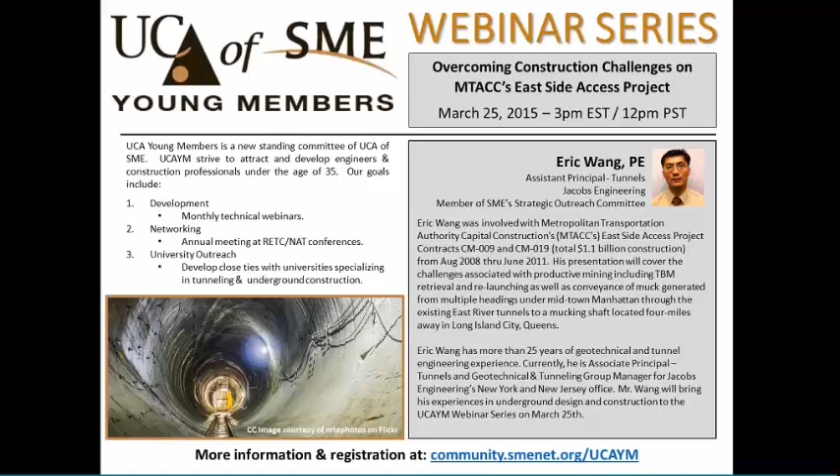Welcome and good afternoon, everyone. Thank you for joining today's webinar entitled Overcoming Construction Challenges on MTA Capital Construction's East Side Access Project. My name is Eric Wang, and I'm coming from Jacobs Engineering.

This slide is a brief background. I'm originally from Montreal, and I earned a bachelor's in civil engineering, as well as a Master of Engineering in mining engineering from McGill University.

I began my career working for a tunneling contractor in 1989, working on a $3 million drill and blast tunnel job, a connecting tunnel under the St. Lawrence River that also featured shaft sinking and tie-in to an existing plug to the Southern Interceptor. That was my first tunnel construction project, and I was with that contractor for about 3 years.

In the early 1990s, things started to slow down in the underground industry, in Montreal in particular, and I relocated to New York to join the Geotech and Tunneling Division at Parsons Brinckerhoff, working on several tunnel assignments such as New York City DEP's New Croton Aqueduct.

That was a pressurization study. There was the Cumberland Gap Project, New York City Transit 63rd Street tunnel connection, Cleveland Hilltop Interceptor, as well as another light rail project, the Portland West Side Light Rail Project.

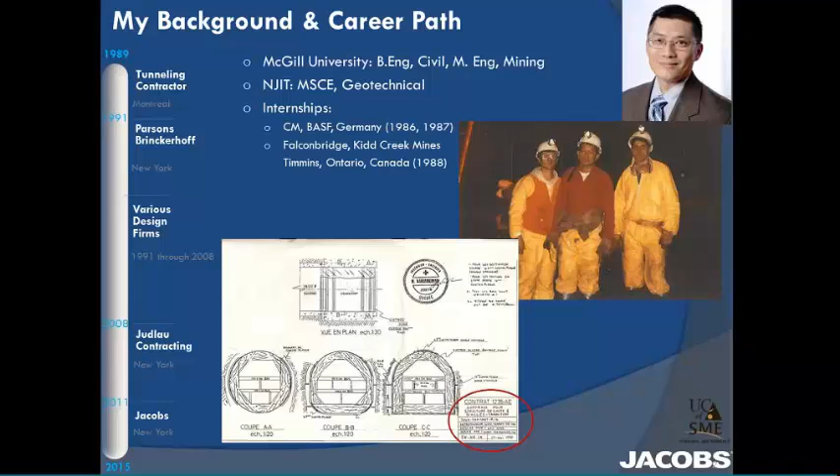Just a little brief rundown on how I got started in the tunneling business. My father was a bridge structural engineer for CP Rail and encouraged me to pursue an undergraduate degree in civil engineering. From there, I took general civil engineering courses, and I began a master's in 1988 in mining underground.

During my first interview, one of the interesting questions that came up was what my real career goals and interests were. This is the tunneling contractor that I began working with. I mentioned my background with civil, general civil background, as well as my interest in underground construction. There was a connection, since he had previously been working for Atlas Construction.

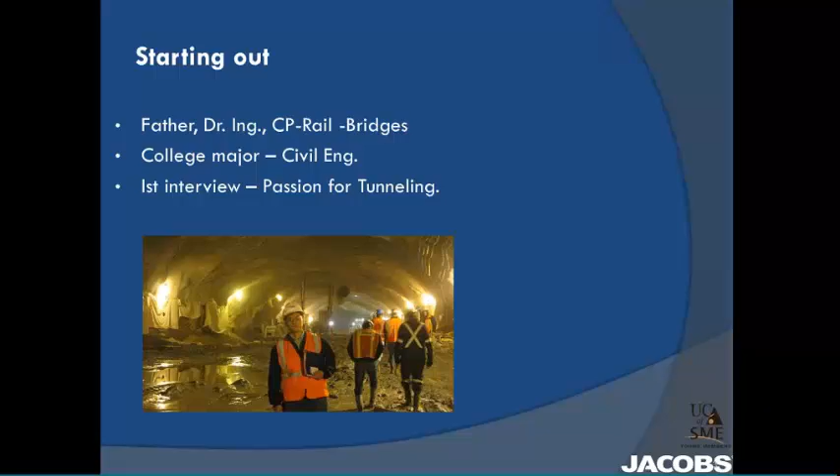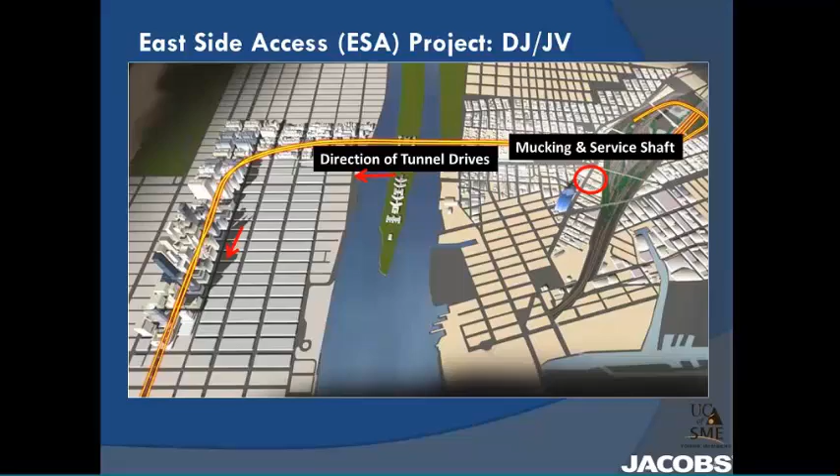The shallow cover under existing subway crossings, and we'll go into some of the challenges that included multiple TBM backup and relaunches, as well as mucking from the heading in Midtown Manhattan out of a mucking shaft located 3 to 4 miles away in Long Island City, Queens.

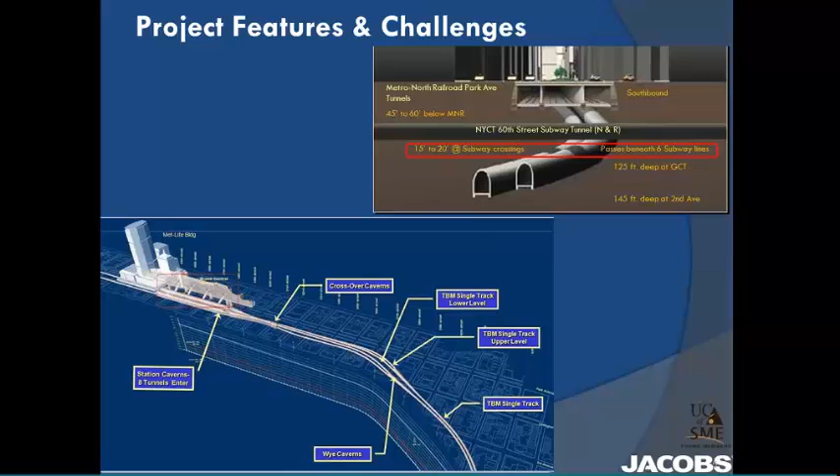Okay, some basic description of the project. We talked about the 8 22-foot diameter TBM tunnels for a total of just over 32,000 linear feet. Cover range from a minimum of 45 to 140 foot depth.

So some of the key dates on the project. It actually involved 2 contracts. The first contract was running tunnel, CM009 Manhattan Running Tunnel. The notice to proceed was June 2006. The first TBM, the Seli TBM, was launched September '07, the eastbound drive, followed a few months later by the Robbins TBM in the westbound tunnel. There was notice to proceed a year later, May 2008, for the cavern structures. Substantial completion was June 2013.

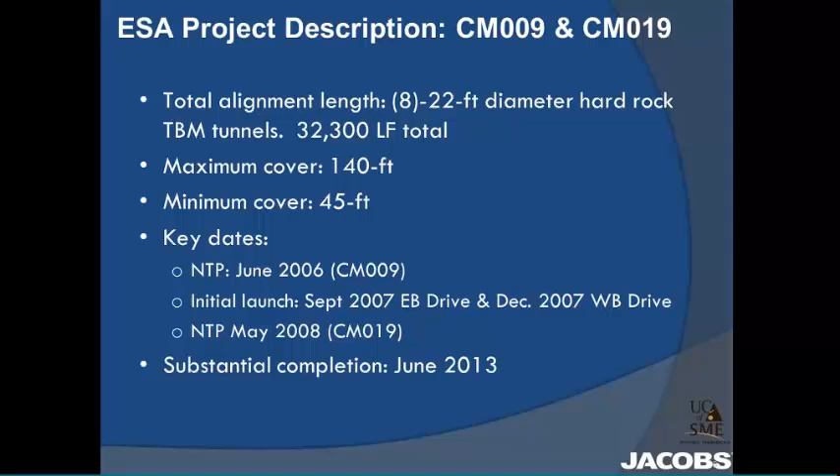Basically, my role was twofold. Geotech engineering manager for Judlau, which involved working as a design liaison between the GEC, the PMCM, and our various design subconsultants, and also providing technical oversight, in particular for the excavation initial support design.

Then in the latter half of my stint, I was involved in the swing shift as a project engineer, overseeing specific operations including cross passage, drill and blast excavation, roadheader enlargements of the TBM tunnel, pre-support in shear zones, and the topic we're going to discuss in more detail: the replacement of ribs for TBM backup, as well as launching and TBM relaunch using the concrete plug concept.

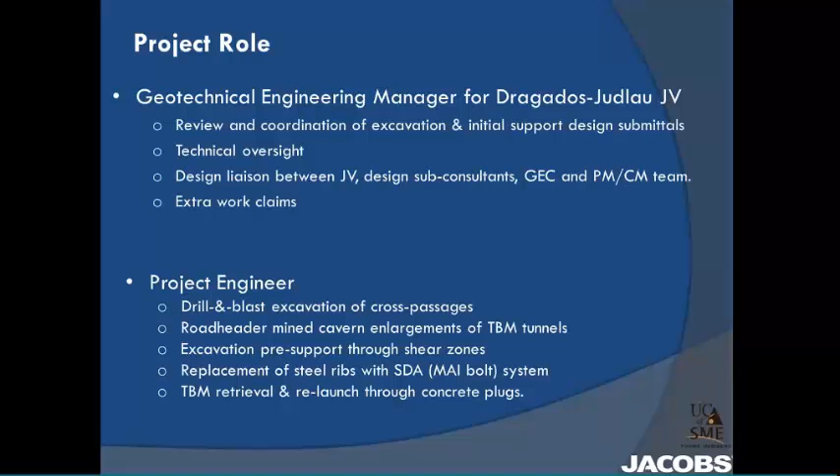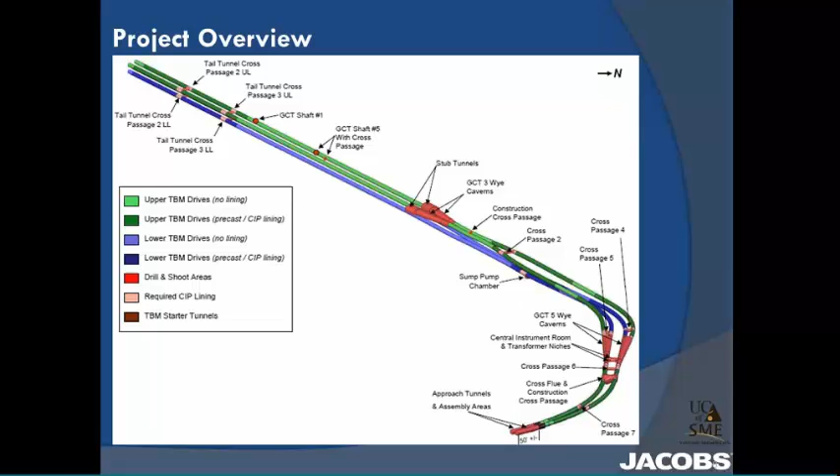Our webinar is going to concentrate on 3 key challenges: expediting the relaunch of the TBMs using the concrete plug concept and why we had to do that; some of the challenges with muck handling and muck conveyance, since the mucking shaft was 3 to 4 miles away from the heading, dealing with various types of muck, shot rock and drill and blast, as well as roadheader fines and TBM muck; and also, to permit backup of a fully assembled TBM, how we overcame the rib replacement sections that had existing steel ribs.

So let's begin with the relaunch of the TBM. Again, we had multiple TBM drives, backup and relaunching operations. What we're showing here in red is the Wye Cavern area, where we had to back up the TBMs, create a starter tunnel with a roadheader, and then relaunch through to the subsequent drive. Then we'll look at why that proved not to be feasible in terms of construction schedule.

Looking at some of the excavation options we had to choose from: conventional drill and blast were available, as well as roadheader and TBM.

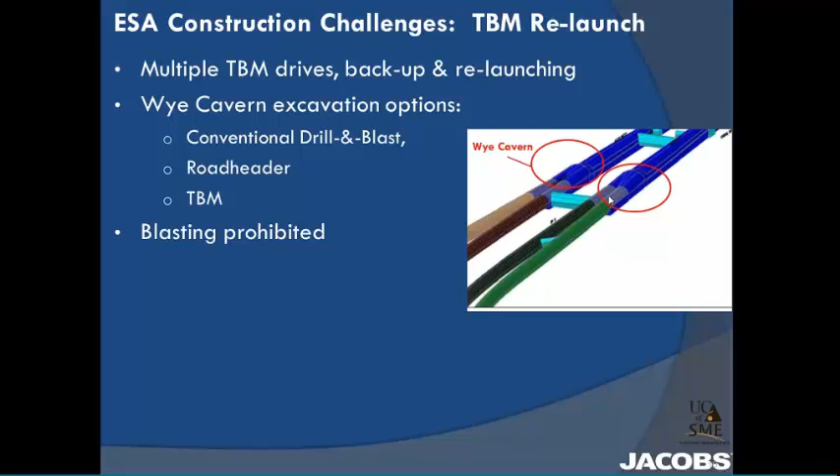So here we're looking at the mining sequence that was used in the initial Wye Cavern enlargement. This is over on GCT3 eastbound. We used the road header. You can see the road header in these three different sections, the small, medium, and large Wye Cavern section. You've got the road header mining,

enlarging the existing TBM tunnel. Over here you've got the drill jumbo installing the initial support, and then you've got the scoop tram working on mucking out the heading.

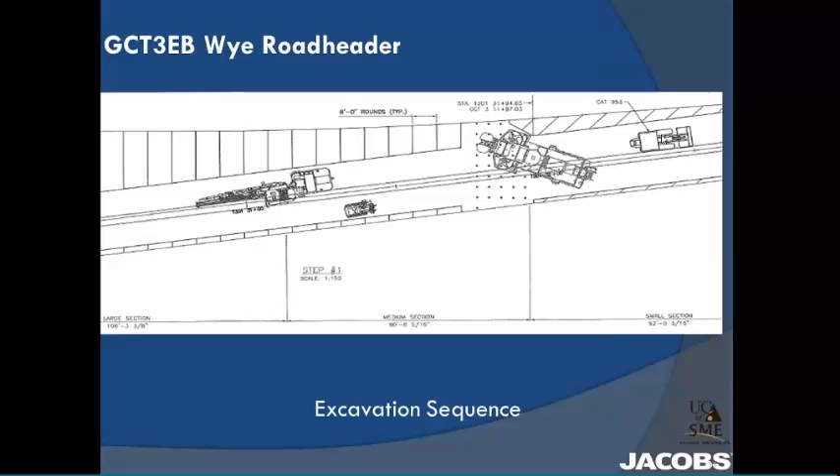Okay, here, this cross section, as we mentioned, we looked in plan view, we saw the small down here, medium, and then the large Wye Cavern sections. And what I'd like everyone to focus on is the ramp, the muck ramp that we had to create in the medium and large Wye Cavern section. The purpose of that was to provide access for the road header so we could reach the arch, excavate the arch, get access to that.

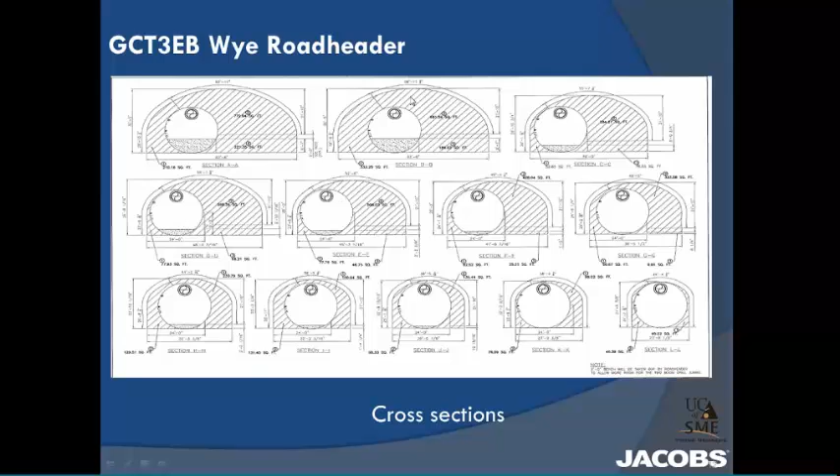Okay, talking about some of the specific construction challenges with the road header, some of the material that we encountered at GCT3 eastbound proved to be very abrasive amphibolite, in particular below the spring line, that generated extensive wear on the picks, so a lot of delays with changing out the picks on the road header cutter head.

The solution we ended up resorting to resolve that is chemical expansive additives. The damite was used. We drilled holes to insert the damite so that we could essentially soften up this hard abrasive amphibolite to facilitate road header excavation. Also very time consuming.

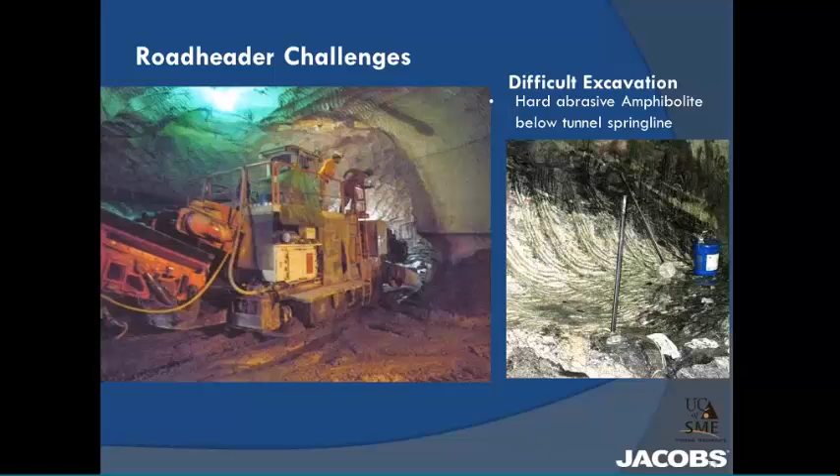Another consideration that we had with the road header option in developing the Wye Cavern is we had to create a starter tunnel in order to launch the TBM. What that entailed was the reinforcement of the existing narrow pillar. You see this narrow pillar here?

We used pre-stress through bolts, number 8 Dywidag, pre-tension to 15 tons on a 4x4 pattern. That was the stabilization method used for the pillar.

As well, you can see up in this area, we also included channels to help stabilize the areas where the grippers would be launching out of the starter tunnel.

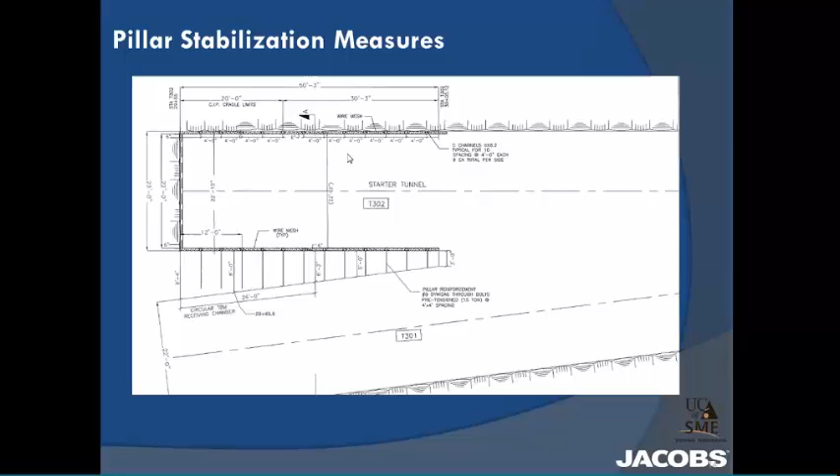So here we see a photo of the drill jumbo working from the completed TBM drive, the initial TBM drive, and installing the through bolts, pillar reinforcement into the starter tunnel.

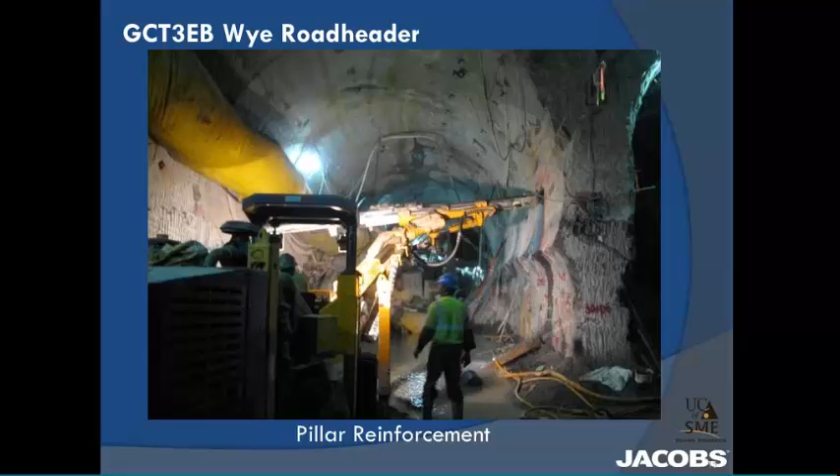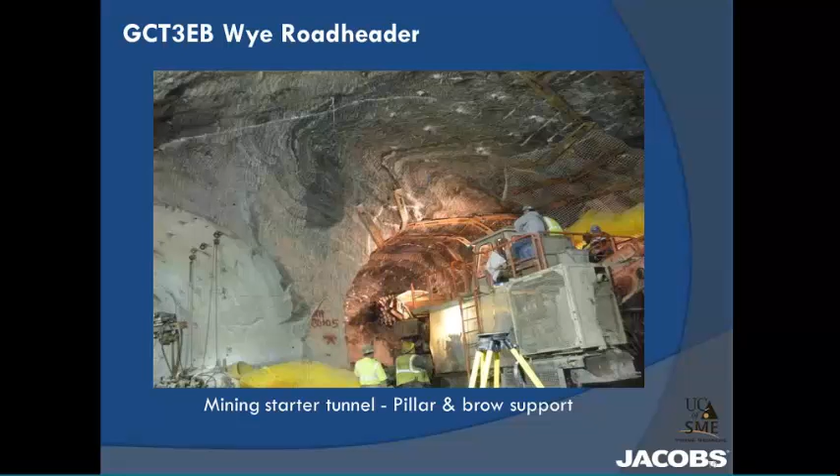Here, another lengthy operation with the initial roadheader option was to set rail, pour a flat invert, and to set the TBM cutter head on rail-mounted dollies, backing it out of the existing tunnel drive, and then here we see it advancing into the starter tunnel.

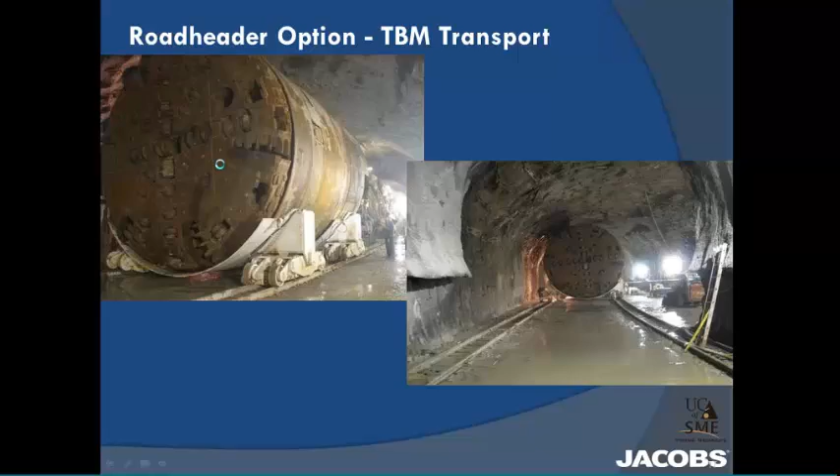So based on all these considerations and the need to accelerate the construction schedule, we had several VE sessions with the GEC as well as the program management and construction management team. Some of the constraints that we had to incorporate into any brainstorming solutions were the existing geometry that was fixed, what the ground conditions were, these favorable ground conditions, or any options that we would be looking at to accelerate the relaunch, obviously the schedule.

So based on these multiple discussions, these VE sessions, the outcome was the concept of the concrete plug, which we'll talk into a little more detail.

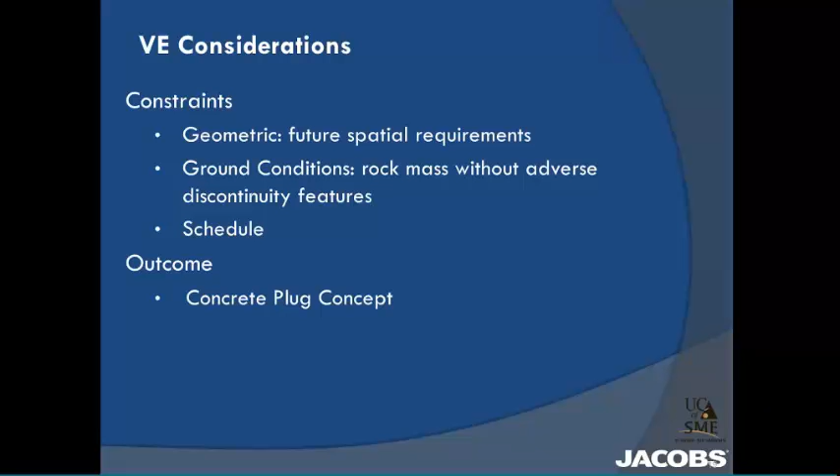We started with the initial concrete plug, a cellular concrete mix, with the basic objectives of optimizing concrete volume, minimizing how much concrete since this is a temporary plug that we have to mine out later, and maximizing the amount of rock excavation. You can get a lot more effective rock excavation using the TBM than the very slow roadheader, and drill and blast was not an option because of the restrictions below Grand Central.

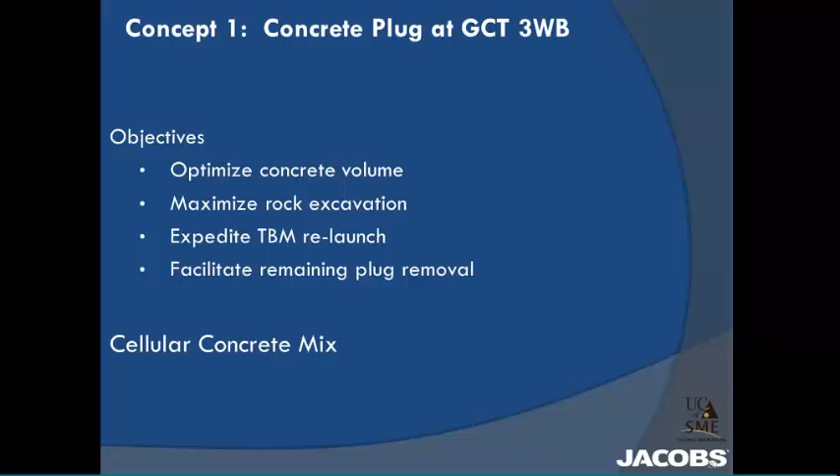The main objective is to relaunch that next TBM drive, and we looked at options that could help accelerate removal of the remaining plug within the Wye Cavern. So let's look in a little more detail.

Here's the layout. What we see is the existing tunnel, the outer tunnel, heading down into the station, going north to south. This is the location where the concrete plug was poured, and here, this second drive is the TBM that mined through there. You see the concrete plug was extended still within the Wye Cavern to a certain point where we achieved the minimum pillar thickness. That's why the temporary concrete plug was extended to this point to get that minimum pillar thickness. This, being temporary, would have to be mined out with the roadheader or various excavation options.

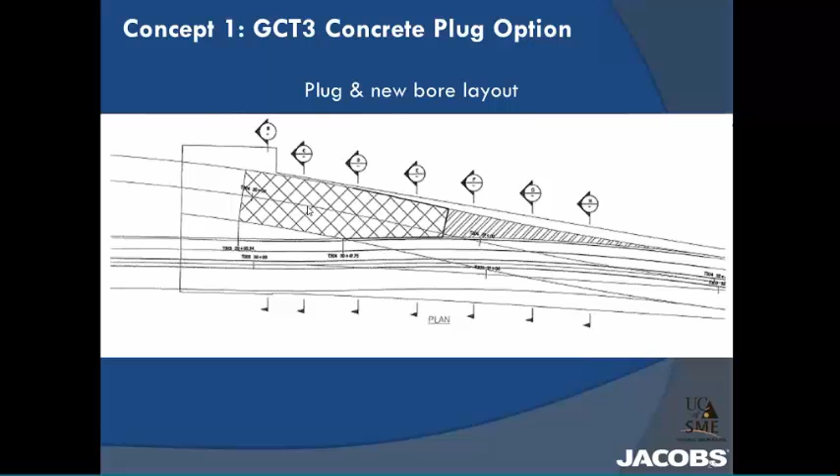I want to show a comparison of what we did on the eastbound side using the slow roadheader, 7.5 month duration, versus what we tried to achieve with this new option, the concrete plug, pouring it in the existing tunnel and accelerating the TBM relaunch.

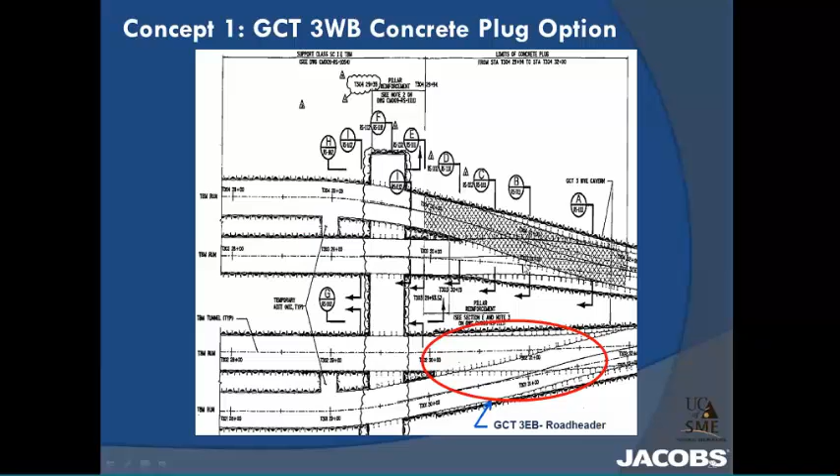Let's look in a bit more detail. Here's the cross section showing the various sections within the Wye Cavern, keeping in mind these are the limits of the Wye Cavern we have to achieve. What's important is these are not the typical bolts we use for the running tunnel - this is an area where you enlarge the TBM running tunnels to bifurcate into the Wye Caverns, so these are longer bolts that had to be installed.

These bolts had to be installed in the existing tunnel prior to the concrete pour, and then in the subsequent tunnel we installed them after the TBM was relaunched.

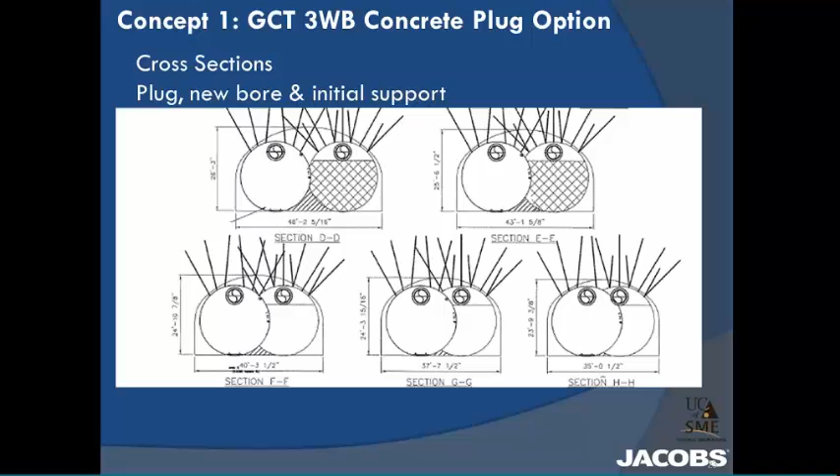Another important consideration was how the main bearing would hold up under this mixed face condition - rock as high as 14 KSI unconfined compressive strength versus cellular concrete at about 1 KSI. This uneven loading had to be considered, so we did an analysis of the maximum overturning moment the main bearing was designed for and compared that with this mixed face condition. With that, we were able to back calculate and figure out the limit on our thrust on each of the disc cutters so we would avoid damaging the main bearing.

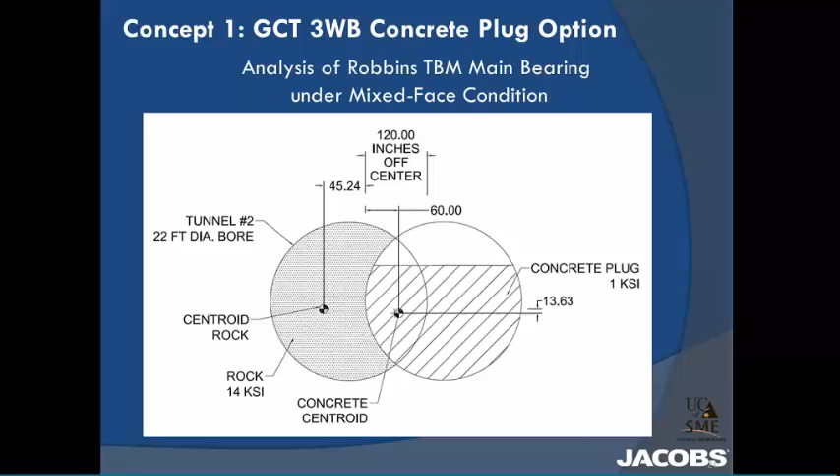Another interesting note is some construction difficulties with the concrete plug that we addressed in subsequent refinements of this concept, like when we had spalling. This is an area where the grippers press against the cellular concrete, and without confinement at the top of the concrete plug we experienced spalling to such an extent that there was actual damage. We had about 7 days of delay repairing the gripper shoe that had been damaged because it was no longer supported.

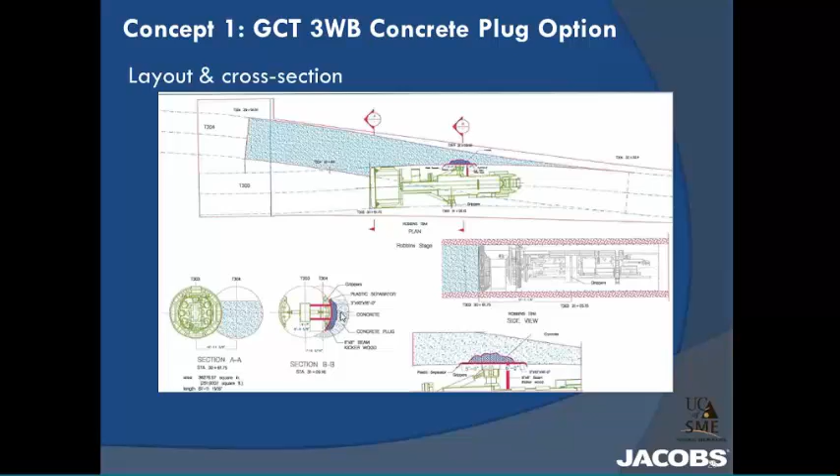To address that, in areas where spalling became an issue we installed additional timber cribbing on top of the temporary concrete plug to provide confinement, and tried to minimize the gripper forces.

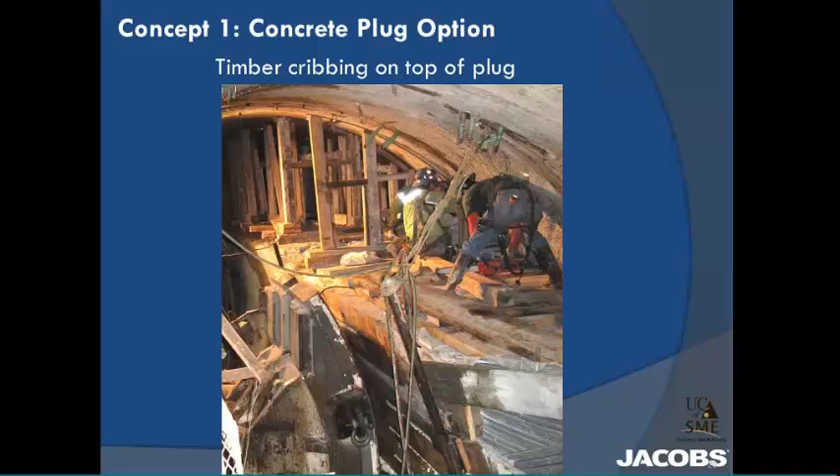The last piece of the plug option, as mentioned, is this temporary reinforcement of the existing pillar to allow expediting the TBM relaunch. We had to remove that to allow continued excavation within the Wye Cavern to open it to the final cavern limits.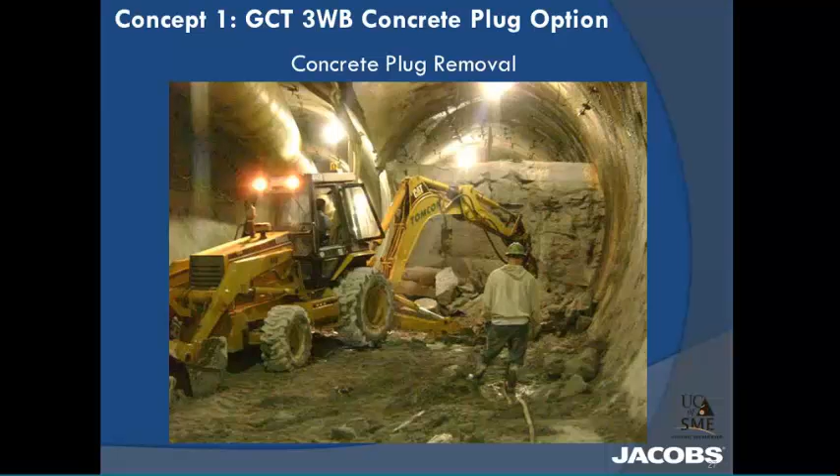We talked about various refinements and variations of the original concrete plug concept - lessons learned. Concept number 2, back at GCT5 westbound, we said with that cellular concrete mix we had a lot of issues with spalling, so we focused on something providing high early strength, self-leveling concrete mix, while realizing we'd still have to remove this temporary plug subsequently. We also looked for a reasonable 28-day strength to facilitate removal, and wanted to reduce the concrete volume, since removal depends on how much concrete you put into that plug.

One option we looked at was taking up some of the volume with a water bladder secured to the invert, filled with water, to take up some of the volume.

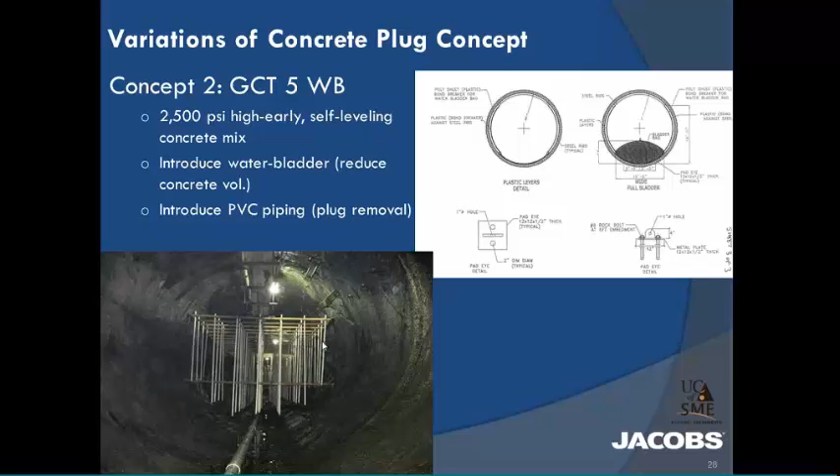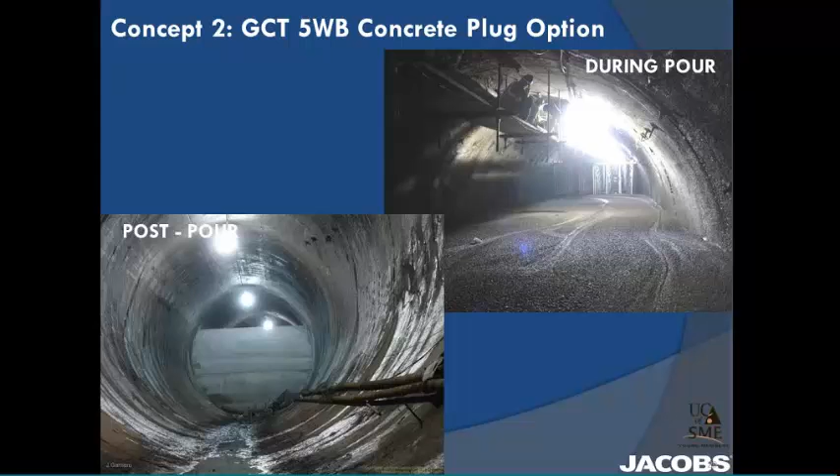Moving right along to another concept we came up with on the concrete plug, we were pretty happy with the concrete mix, but we really wanted to accelerate removal of the plug. And here we also looked at how we could accelerate erection of the form for the plug.

So what we did is before we backed up the TBM, we created drill and blast niches. These niches were storage niches that accommodated two things: the formwork for the bulkhead for the concrete plug, as well as the dollies for the cutter head for backing up the TBM. So that was very helpful. And the roadheader excavation of the plug - you'll see more clearly why we needed to do that on the subsequent slide, the layout.

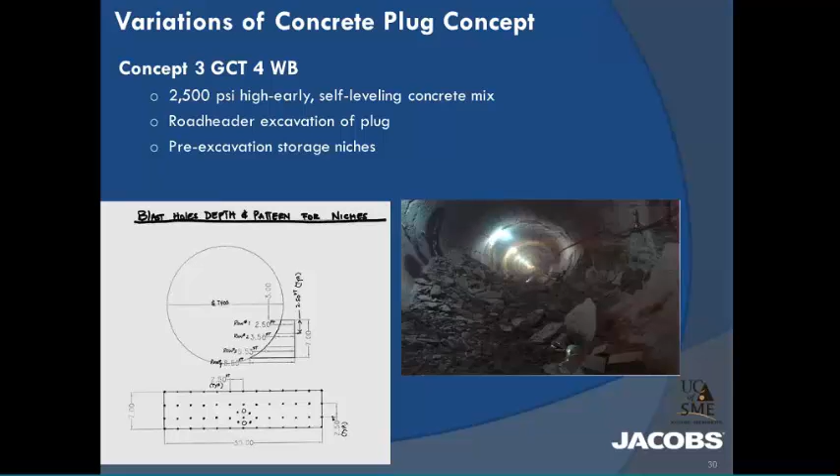So here we're looking at - it's very sensitive, the mouse - but here's the plug, and then this is the subsequent TBM drive. And so what we are trying to do, here you see below, we're creating a ventilation bulkhead so that we can isolate and perform the roadheader excavation.

Why we needed the roadheader excavation - once the TBM passed this point, we started working back here using the roadheader to mine out a little access way so we could provide access to the miners to perform drill and blast excavation of the east-west adit further on. So we didn't have to wait until this plug was completely mined out. We just used the roadheader to create a little access way here, and that obviously was much faster than the hoe ram that we saw before.

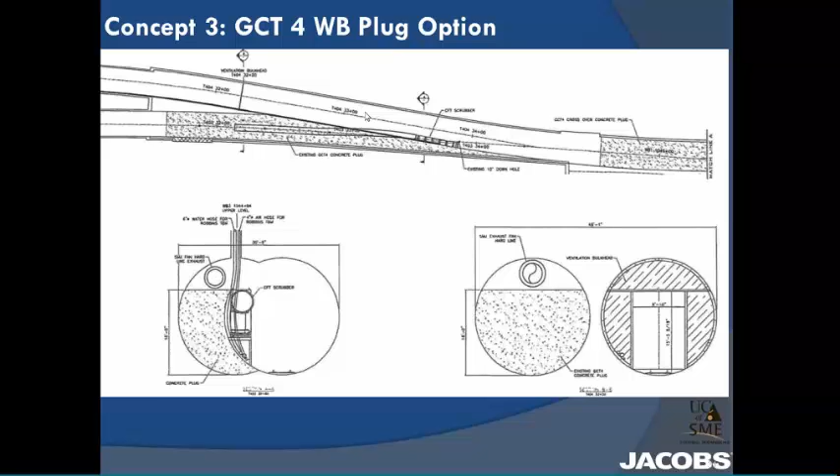Okay, so really, this concept number 4 is our last opportunity to use the concrete plug option. It was that GCT4 crossover, and what I wanted to show here was how we used a ventilation bulkhead that was installed while we were mining. So, let me go back. While we're mining here in this new tunnel, in the relaunch tunnel, and this is the area where we had the existing tunnel that was filled with the concrete plug.

What we're doing is up here we're creating these partial ribs, if you will. And you got to keep in mind, as you see in this photo, this is mining through the plug - it's not uniform. The opening starts from very small to gradually increasing, and you can see that more in detail here as you start at the end where you're breaking out daylight out of the plug into the new tunnel. You still have that minimum pillar thickness that we talked about that gives you the limits of the plug. And what you're doing here essentially is using this partial rib idea to prepare a dust curtain, a cutoff wall, so that you could work independently.

The roadheader could work over on this side, with the protection of the ventilation bulkhead, and then the TBM could continue mining. So actually, these were installed at the back end of the TBM. So these are some of the innovations that were used to expedite the GCT4 crossover cavern, as well as launching the TBM.

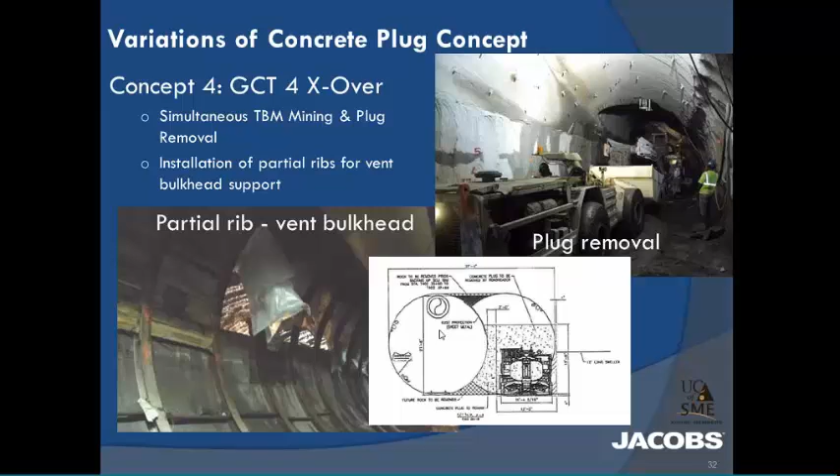Okay, so let's look at what we learned from this whole exercise: the importance of expediting TBM relaunch. Obviously, we couldn't continue with the number of relaunches that we had. We couldn't continue with the slow, tedious roadheader option, and also be prone to excessive pick wear if we encountered some of that hard amphibolite.

What you did with the relaunch, you also had an opportunity to mine more of the Wye Cavern limits. It's more productive to mine with the tunnel boring machine than these other methods, so if we could incorporate that into the overall plan, that was a plus. And obviously, you keep in mind this is an urban setting, this is under Park Avenue, so any reduction in drill and blast excavation is viewed favorably by the client as well as the surrounding residents.

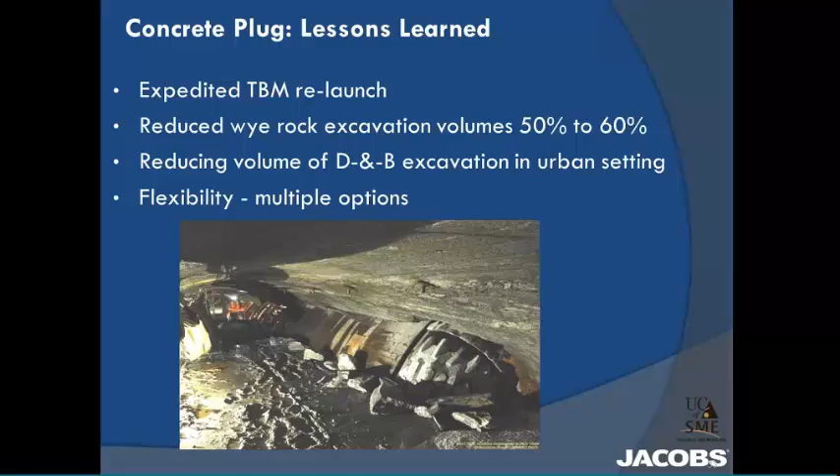With the plug option also, a lesson that we learned is it's a nice flexible option. The flexibility in that concrete plug concept provided multiple options for removal as well as performing simultaneous operations. Okay, the next topic that we need to cover is some of the challenges with the mucking.

You had the extensive cavern dimension. Keep in mind, the original mucking scheme worked very well when we were working on the CM009 contract, when you're just dealing with a linear TBM running tunnels. But as we mentioned, two years in, 2008, we started the second contract, the caverns contract, that included shot rock for the cavern excavation. So basically, we had to revisit that overall mucking scheme, and that's what I want to talk about.

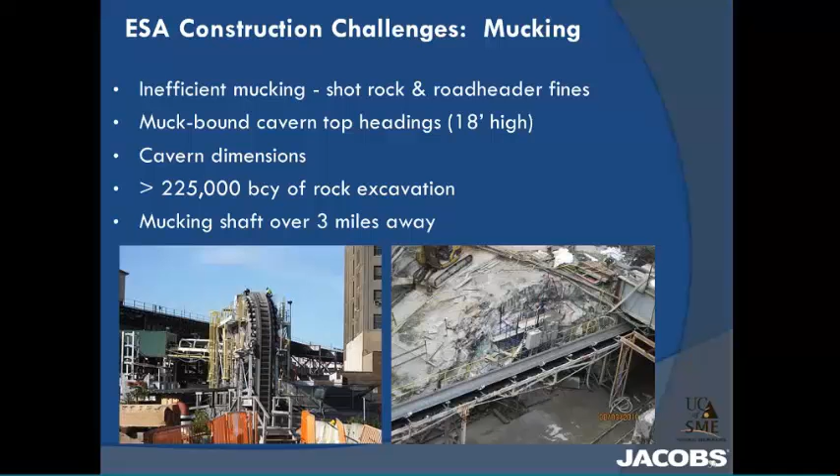Mentioned the difficulty with muck-bound top heading, so here you see that situation. You also see the restricted headroom that you have, and I'm going to show you in some of the subsequent slides why this is a problem getting the traditional conventional muck cars up into this top heading.

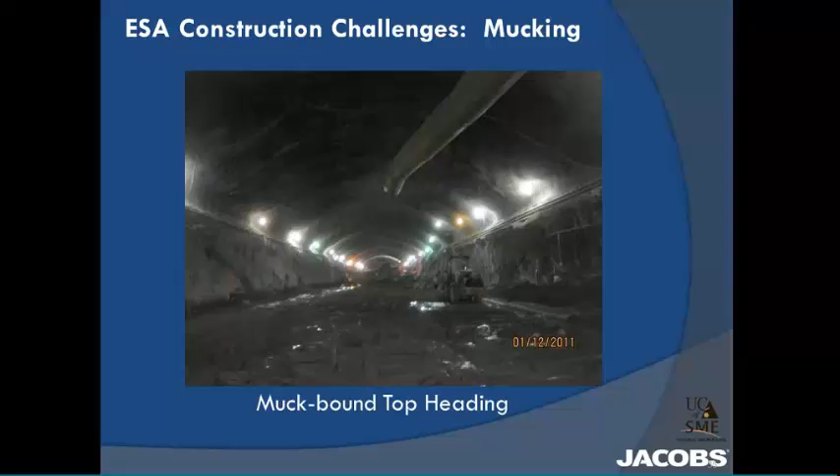What were some of the constraints? So talking about the multiple excavation types, you've got active TBM drives here in red, on either side of the main station cavern. You've got road headers working at the top heading, as well as beginning to enlarge the lower TBM tunnels. And then you've got drill and blast as well, of the cheeks that we had to perform. So what you're dealing with is various types of muck, not all of it conducive to the regular TBM conveyor belt.

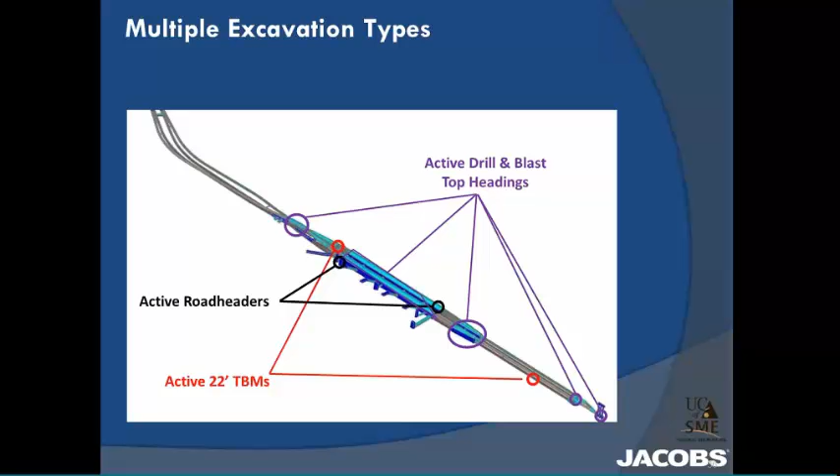So here we see a cross-section of what we have to deal with in section AA, taken through the cavern. You have the top heading, see a lot of that shot rock here. That created difficulties, couldn't put it on the belt.

We needed to use the muck trains where it was available. And then here is the basic cross-section. You've got the road header working in the lower level, and then you had the drill and blast finishing off the top heading excavation.

And here, these were the available tunnels for the rail. But the difficulty with using these for mucking is the availability of these rail tunnels was limited, because you're also using that to bring in material for the top heading. We had to, at the same time that these headings were being excavated in the main station cavern, quickly install the arch waterproofing as well as the reinforcement. So that also took up some of the availability of the rail that we needed for the muck cars.

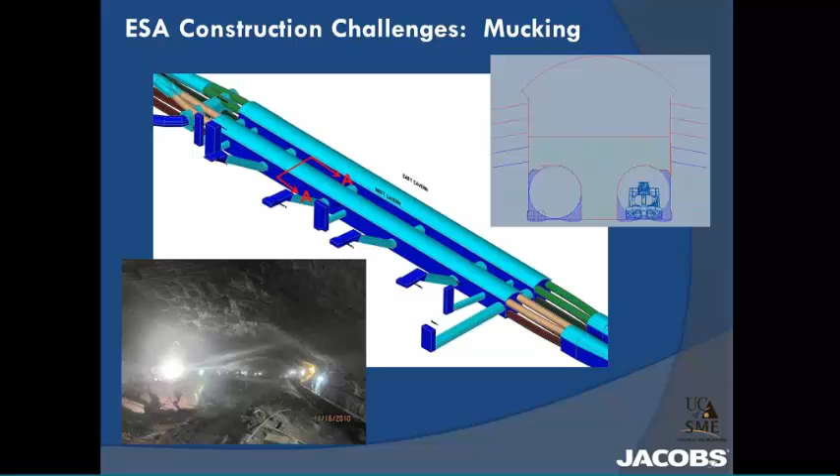Okay, so the solution to all this, and we talked about some of the large shot rock that we had to deal with, is using a crusher. This jaw crusher system we installed within the future Wye Cavern limits allowed us to process the shot rock and allow it to be placed onto a transfer belt and incorporated into the regular TBM conveyor belt system.

And here I want to show this photo of the extra 3.5-foot pit that we had to embed the crusher in so that we could accommodate the load haul dump. The load haul dump couldn't reach the feeder point, it was a little too high, so we had to depress that. And over here, what you see is some of the configurations that we had to use on the discharge conveyor belt. We had to raise that so that you could still have the vertical clearance for bringing in the man trips and using that rail.

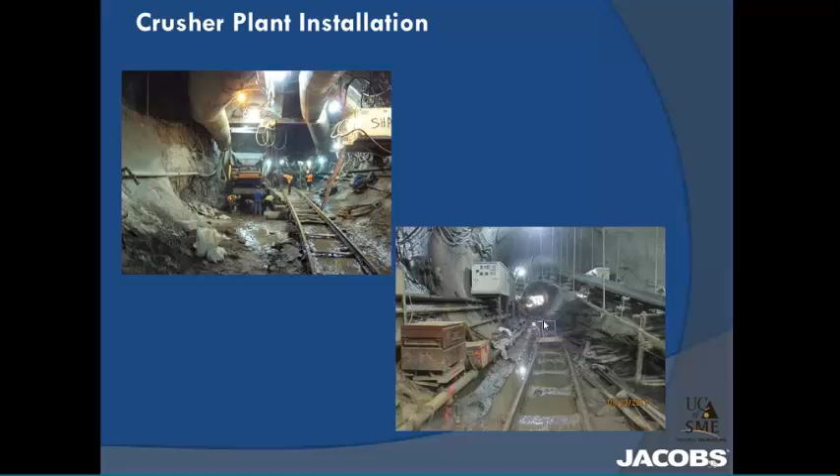So here we see an overview of the crusher as you come into the station cavern. So the initial crusher was in the top heading location, and then when that top heading excavation was completed, it made sense during the bench excavation to relocate that crusher downstairs so that it could facilitate processing of the shot rock from the benching excavation.

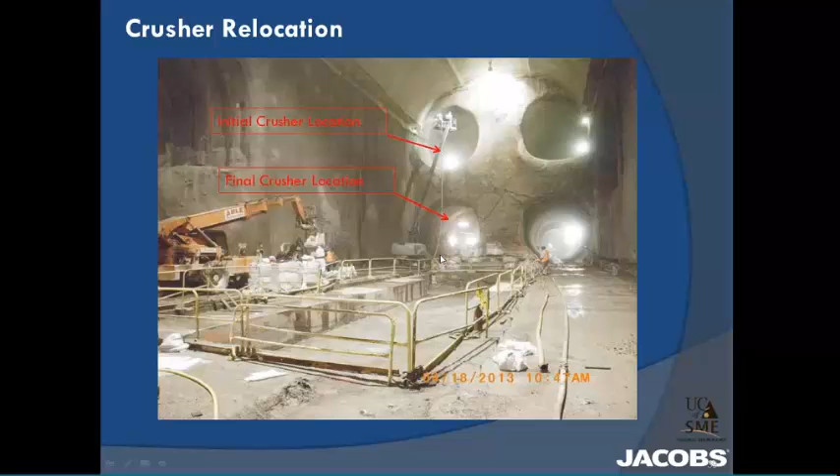Just in summary, some of the reasons muck trains could not be used, and we had to augment the mucking system with the crusher and various belt configurations, is that we only had one crane over at the mucking shaft. So whatever muck cars came back, they had to wait their turn. We had a tail track that could accommodate 1 or 2 muck cars, but not much more than that. Again, limited crane availability, limited geometry to load the trains. We talked about the low headroom situation at the top heading. Rail availability is also a concern. So crane availability, limited rail, low headroom, and inability to meet schedule stayed with that original mucking scheme.

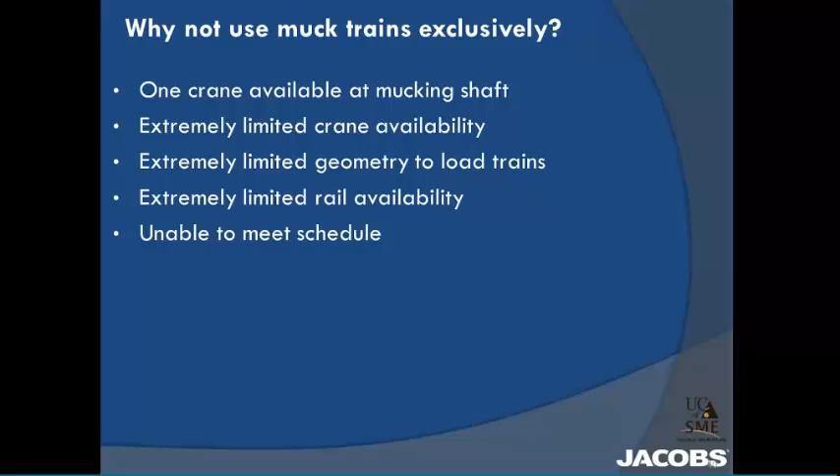The last construction challenge I want to touch upon is rib replacement. Why did we have to look at rib replacement carefully? Because we had 2 types of TBMs. One is the SELI double shield that did not have a collapsible cutter head feature. So the problem with this is we could not reduce the cutter head and back it out of ground class 3 conditions where we had all this existing ring steel. We had to come up with a scheme to replace this ring steel, and also look at ways to leapfrog the existing ring steel where we had mandatory steel sets that had to be put up where we had shallow cover over subway crossings. And obviously any system had to be proof tested.

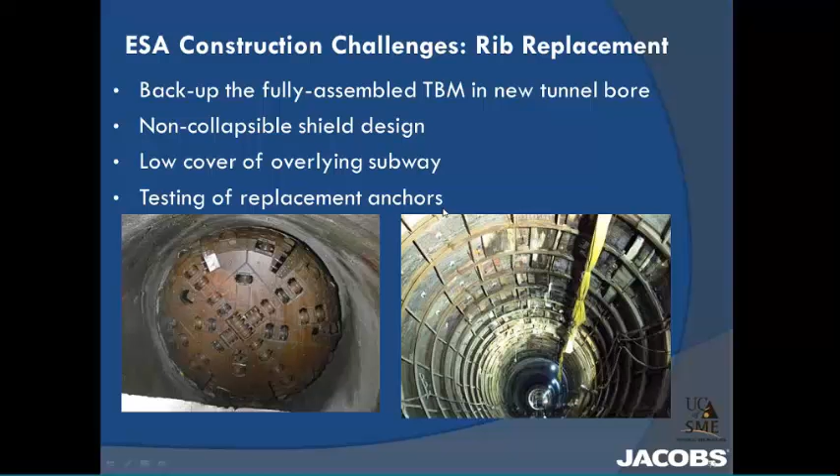We started out by identifying the areas where ring steel would be interfering with the TBM backup operations, to allow the TBM to back up and relaunch. These 5 locations were areas that we actually visited as a team, each of these locations. Bear in mind, some of this ring steel was installed based on the contract drawings that were designed based on the existing test boring information. But now we had an opportunity for revisiting the completed TBM bore, and seeing what the actual ground conditions were like, to see if there were opportunities to upgrade some of the support classes. Also, some locations were fallout zones, like this cathedral void, areas where we had shear zones, the Christmas shear zone, and I'll go into some of the solutions that we had.

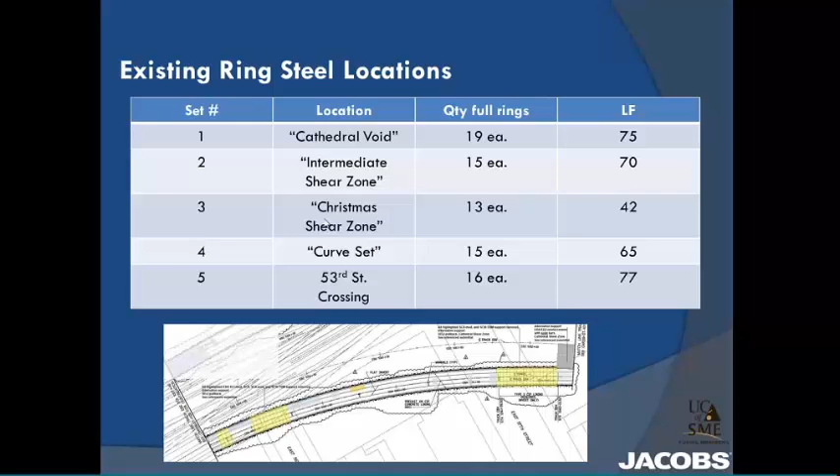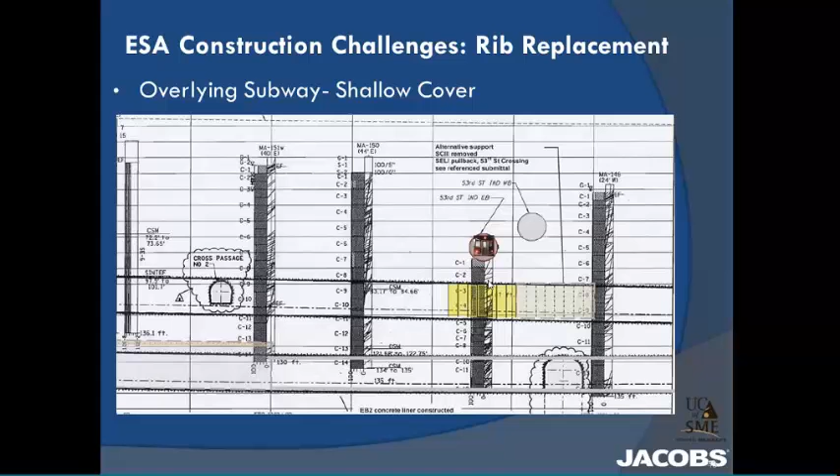Again, there are some areas where mandatory sets had to be installed. So even if we backed up the TBM, we had to leapfrog and reinstall in front of the TBM, bringing your steel through the TBM and reinstalling so you'd have that mandatory set under the shallow cover for the existing subway crossings.

What was the approach that we used? As I mentioned, the existing TBM bores provided actual access to actual ground conditions. So we had the geotechs from the various parties - the contractor, the GEC, as well as the PMC and CM teams - pay visits to these 5 locations where the steel sets had been installed and where they were blocking TBM backup. That provided the opportunity to look at the actual ground conditions and see if there were opportunities to perhaps upgrade or update the ground support classes. This was all done in a team environment with sessions, risk management workshops, where we reviewed the findings in the field and came up with sound, practical criteria that could also be verified in the field.

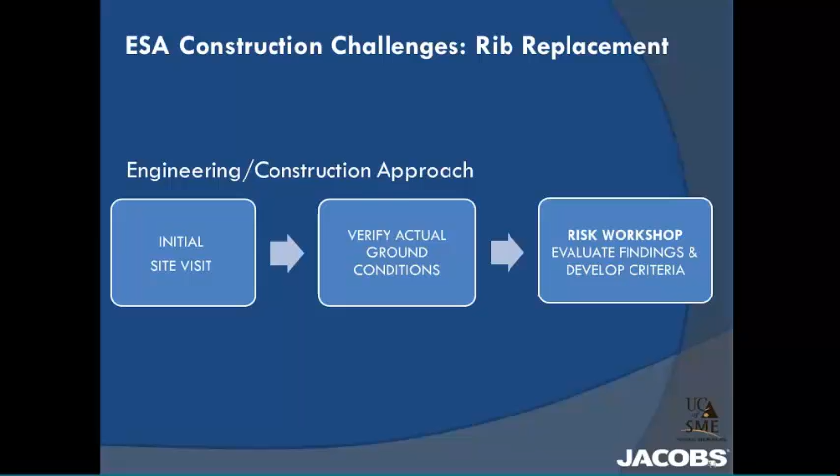We mentioned one of the systems in areas where we didn't have the mandatory ring steel and the ribs could be replaced, such as some of these fallout zones that we're looking at here. Look at this sketch - it basically takes you through the operation, starting from the mixing, the careful observation of the drilling and installation. You got to keep in mind this is an area where we had sustained fallout. So in order to continue mining the TBM, we had to place cellular backfill, and that provided a very clear indication - when you're drilling these MAI bolts, these self-drilling anchors, you can tell the difference in the resistance when you're going through the backfill compared to in the host rock. The requirement was 10 foot of competent embedment into the competent rock. Once we achieved that, we proceeded in step 2 to inject grout through the MAI bolt. There was a sacrificial drill bit that popped off and allowed the grout to be injected, fully encapsulating the bolt.

The pressure gauge indicating the testing of the bolt, and then we repeated the subsequent pattern that was designed beforehand, and provided pull testing to verify. Any anchors that failed, we subsequently had to install replacement anchors that were also pull tested to verify capacity.

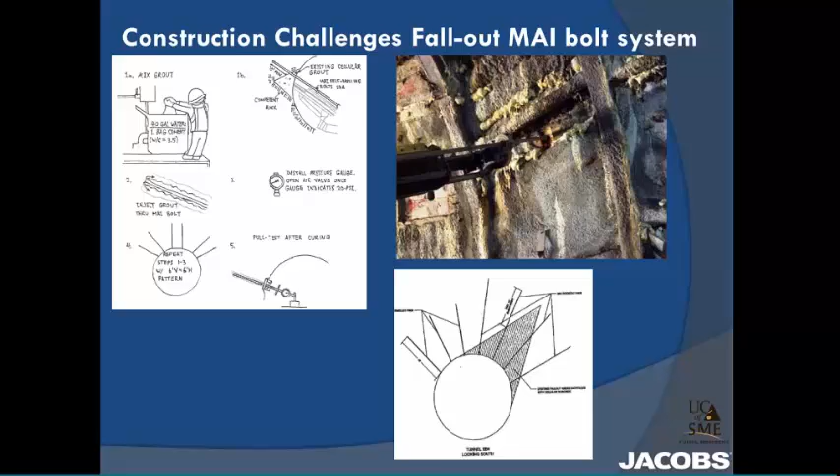Okay, with that I want to move on quickly to touch on some career challenges I was asked to mention. At the beginning of your career, you're really trying to define your strengths, where your strengths and aptitude lie, and trying to match that up with a practical career that you'd enjoy.

I mentioned that in 1991, things were getting slower in Montreal. Tunneling jobs were few and far between, so I had to adjust to relocating the family to the U.S., to New York, where I've been able to remain for the last 20 or so years.

You're going to have to deal with family and work balance with various assignments. The other point I want to make is the importance of considering the challenges of projects - there's some sacrifice on the family end with relocation involved, versus working in an operational capacity within a group at one fixed office location, though your involvement may be on smaller scale projects, or if fortunate, challenging local assignments.

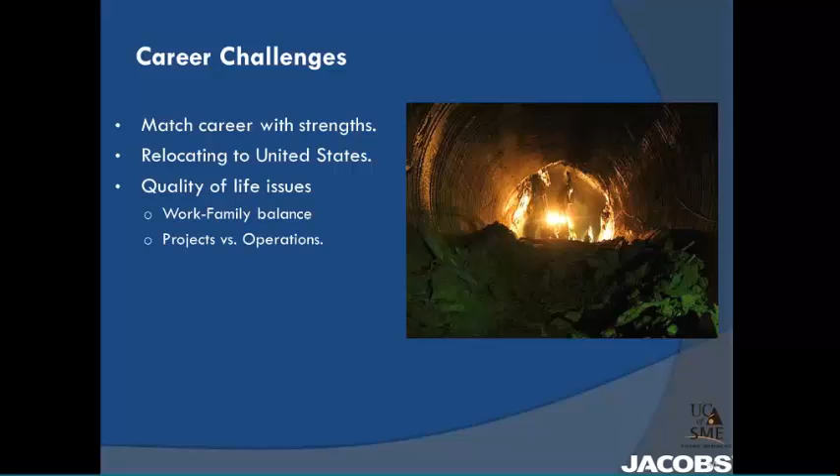Okay, with that I want to wrap up and summarize that personally, I've been able to enjoy the tunneling industry for the opportunities to deal with many challenges and incorporate innovation, thinking out of the box. As you saw in a couple of the case history examples, these aren't textbook solutions - it's using judgment, understanding the ground conditions, understanding what we're trying to achieve, and looking at opportunities to optimize.

Contractors are looking at time and money - time and money are paramount. Tunneling is also a very high-tech, progressive industry. There's a lot of software tools now available that help us with analytical problems, looking at shear zones, ground support, spiling pre-support that could be used, and opportunities to verify that with predictive models.

I also believe this career, tunneling, is very team-oriented - it's relationship-based. What I mean is on these projects, you're working side by side with key like-minded mentors and colleagues at the same experience level, or who bring other facets of their personal work experience. What you're trying to do is bring out the potential of everyone on that team to deliver the project, to deliver outstanding quality. So I believe tunneling provides that opportunity to work in a team setting.